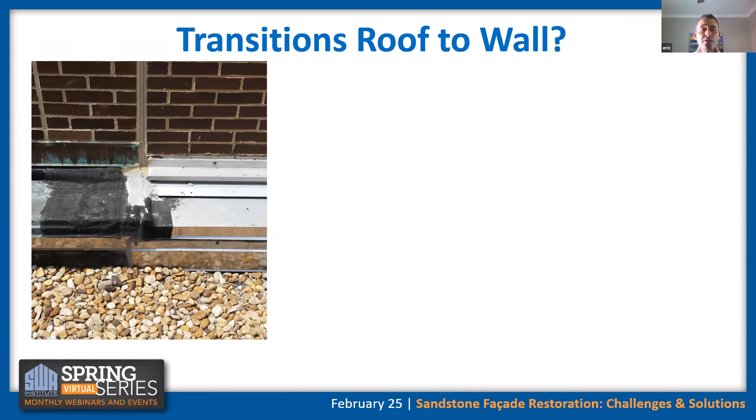Here's an example of transitions roof to wall. If you talk to a maintenance guy on this project, he'd tell you this is a 'dope and hope' condition. There's a transition right there where it could have had a boot created on that vertical and tied into

the roof joint on that horizontal to maintain continuity of seal. Here's another example, existing to new, where we'll see a vertical joint go up to maintain the proper distance and maintain the expansion joint between the two buildings, tying into that roof joint.

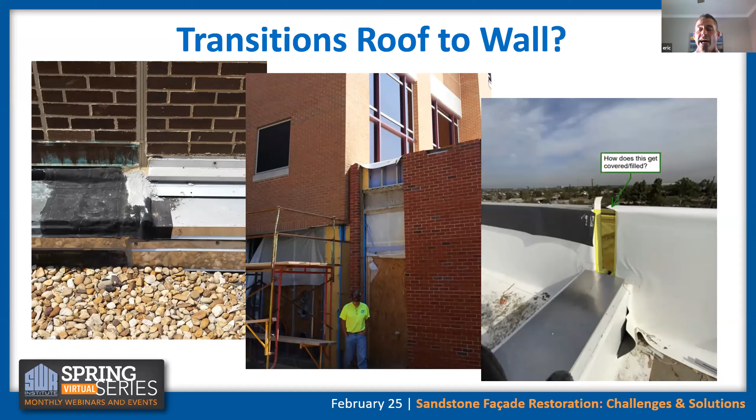Here's a common one we just recently received. Somebody had a roof joint coming into a condition on a parapet, and the question always is, how do we transition here on that parapet roof?

So when we get into roof joint, for example, this is what we call continuity of seal. This helps us transition between vertical to horizontal roof conditions. It's a patented dual seal system with a dual flange extruded rubber system that ties into all commercial roofing membranes, and then also waterproofing systems.

Uses and application areas: you'll see it on roofs, you'll see it in plaza assemblies, you'll see it on green or vegetated roof assemblies, and you also see it buried in softscape aspects.

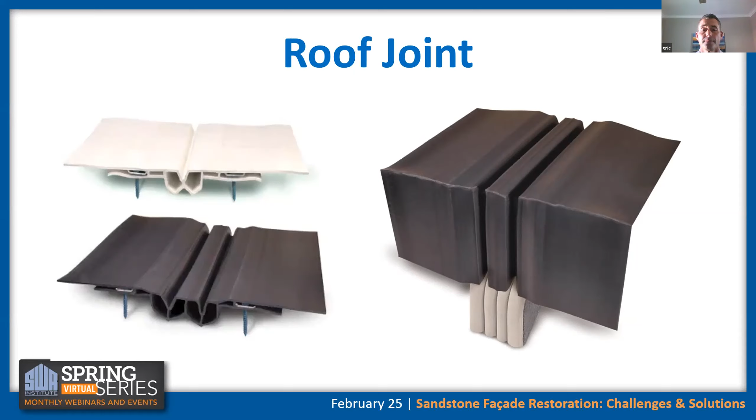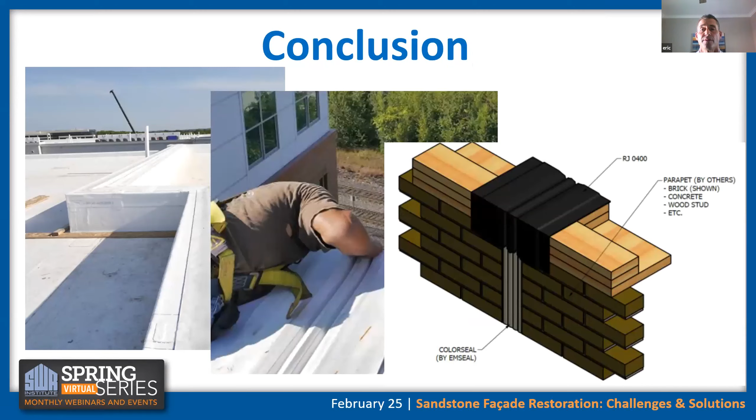Go up, I'll go up one. There should be one more slide. Well, hold on, no problem. Get it back up to where it was. Sorry. Is this it? There should have been a video section between slides 6 and 7. Well, darn it, I don't... this is all.

So unfortunately, there was an animated roofing video that really showed this well, so I'll describe it. Basically, this stuff comes as an extruded membrane, in as long runs as we can. The biggest question we always get is how do you get into a parapet condition or edge of roof. There's two conditions on a parapet. How do you do

Nicole, Eric got muted somehow. I know, I'm unmuting him. There he goes.

I don't know how much you heard regarding the animated video, but bottom line, we're going to show how we tie into TPO and maintain that continuity of seal. There's two conditions when we hit a roof condition: it's usually coming up and over a parapet and tying into the vertical, or into an edge of roof aspect. Depending on if it's over a parapet, there's two conditions we can use: basically the TPO roof membrane or PVC roof membrane to go up and over that.

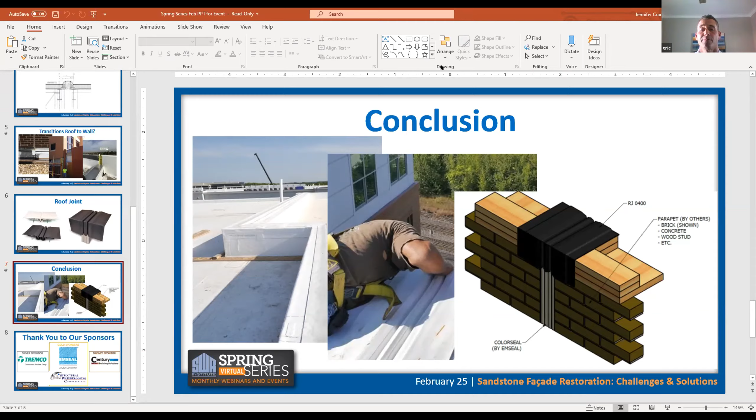In conclusion, when it's specified and designed properly, when you go vertical to horizontal, you maintain that continuity of seal, ensuring that big void spot stays airtight and watertight. I appreciate everybody's time. Unfortunately, I wish you'd been able to see the video. Maybe one time I'll be able to get that video online.

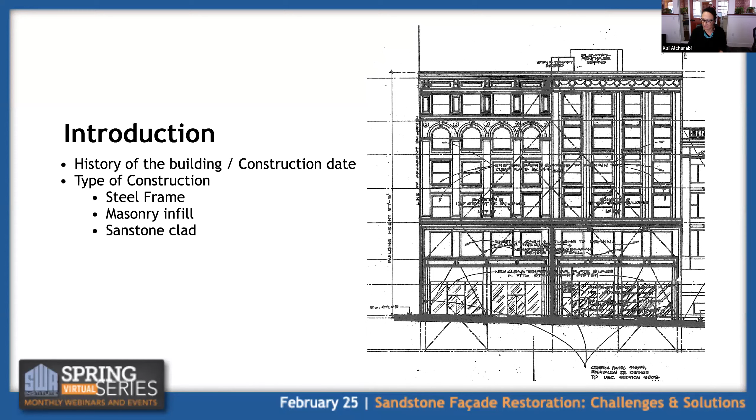We had great limitations imposed on us because of the location of the building and because of the kind of retail tenants that occupy it. The tenants are Yves Saint Laurent and Bottega Veneta, both high-end retailers who pay huge amounts of money to our client. We understood that Yves Saint Laurent pays something in the realm of $300,000 a month for rent.

So obviously they have great restrictions in their lease, limiting the duration of any construction on the facade to only 60 days. So we only had 60 days to accomplish the project. The fact that the building is divided into two facades facilitated that, because we had 60 days on one side of the building and 60 days on the other. The retail tenants are squarely underneath each one of the two parts of the facade, so that made it easier to navigate the leasing agreement requirements.

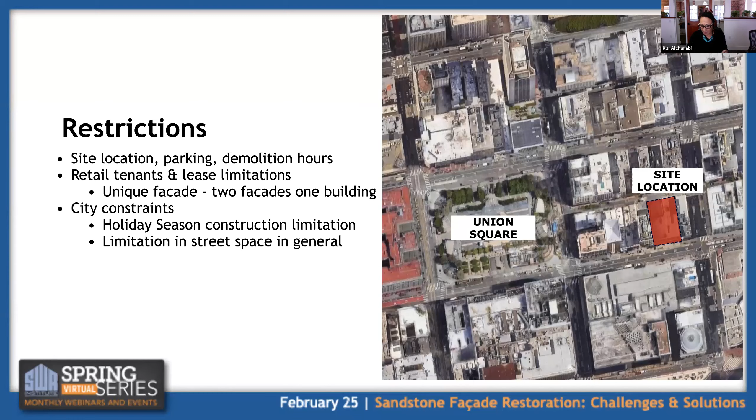That imposed additional limitations. We started by surveying the facade. We did a visual survey identifying the materials on the facade. We did some very limited destructive testing to verify the conditions behind one piece of stone. We did hazardous material testing conducted by an environmental engineer. We did adhesion testing on the coating that is on the stone, because we weren't going to remove all of it. And then we did some grout testing.

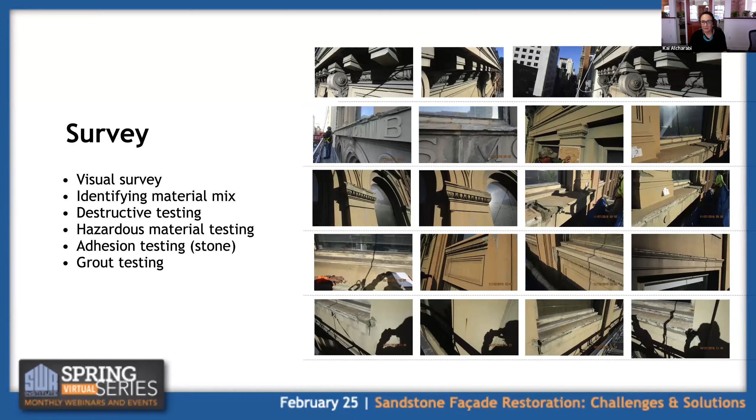The metal cornice, luckily, were really in fantastic shape. It turned out they were all zinc alloy and in just amazing shape. The building was built in the early 1920s, so almost 100 years now.

We just had a lot of flaky paint that was obviously loaded with lead.

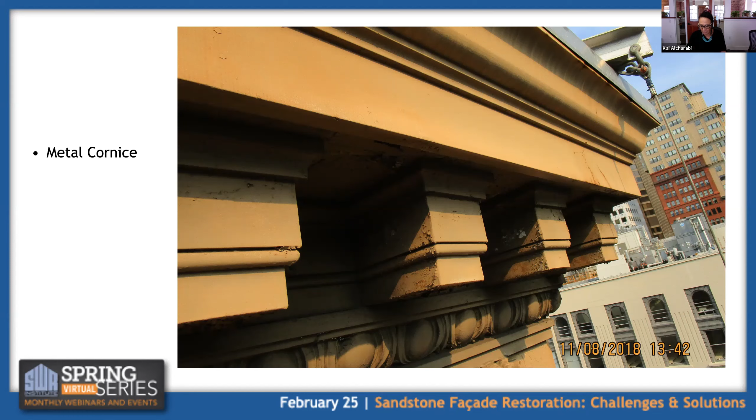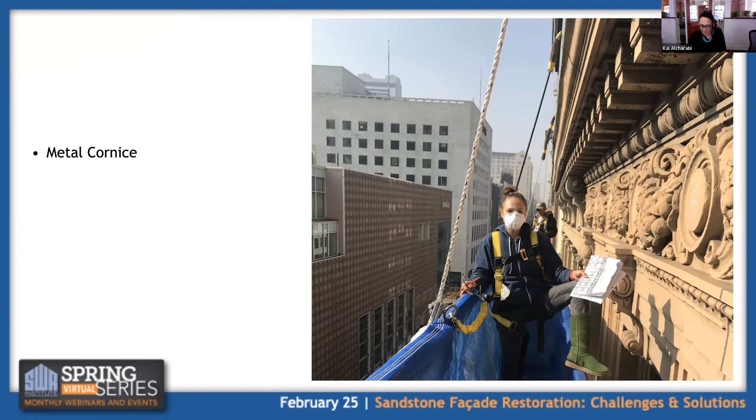Here is a couple of pictures near the cornice that my colleagues are fond of taking of me on scaffold, so that they can make fun of me later.

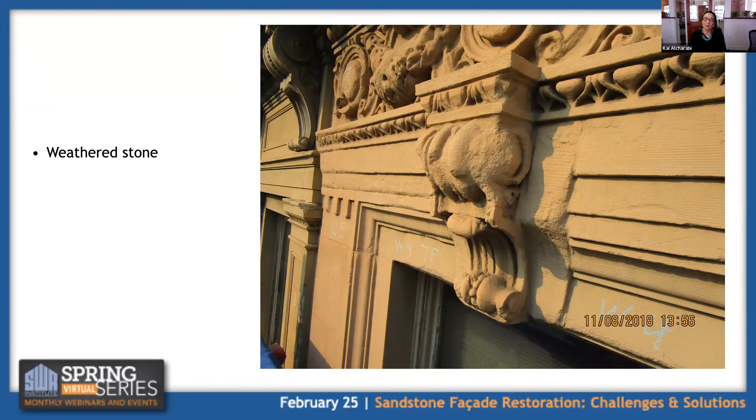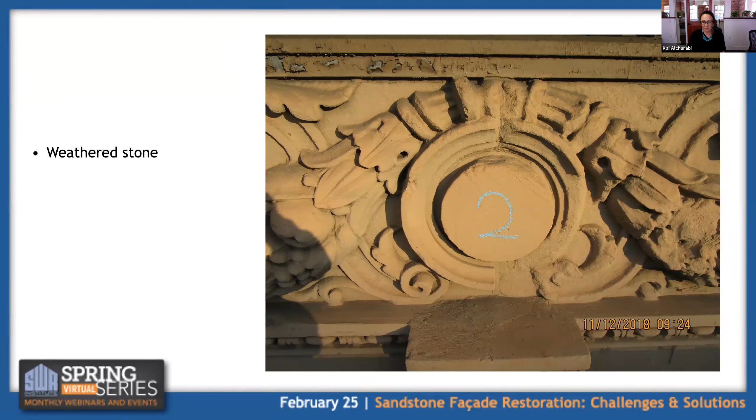The stone survey, which is the most complicated aspect of our survey, showed we had plenty of weathered sound stone -- stone that had exfoliated in the past, but had been taken down to sound stone and then painted. You can see plenty of examples where we are starting to lose details of the ornamental details on some of the cornices and other ornamental pieces, but also examples of where the stone was really sound, not experiencing deterioration.

We also had light exfoliation, and that was widespread. We had deep exfoliation as well.

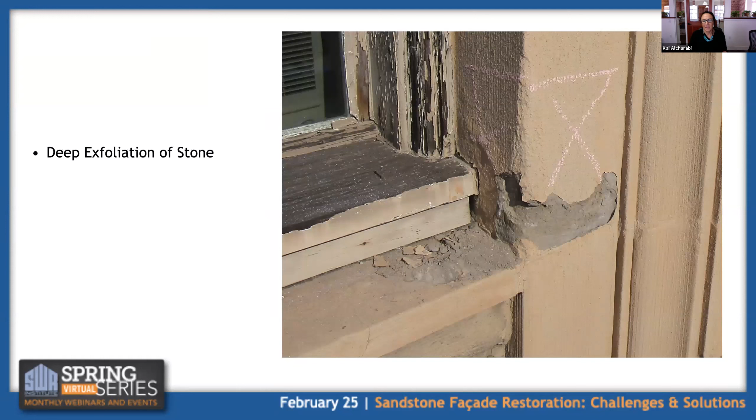Particularly a badly hit area on the building was the lettering at the top of the building, which was originally carved in the stone.

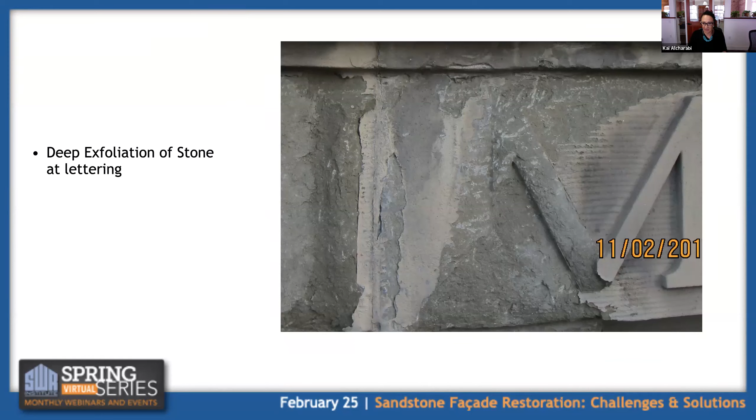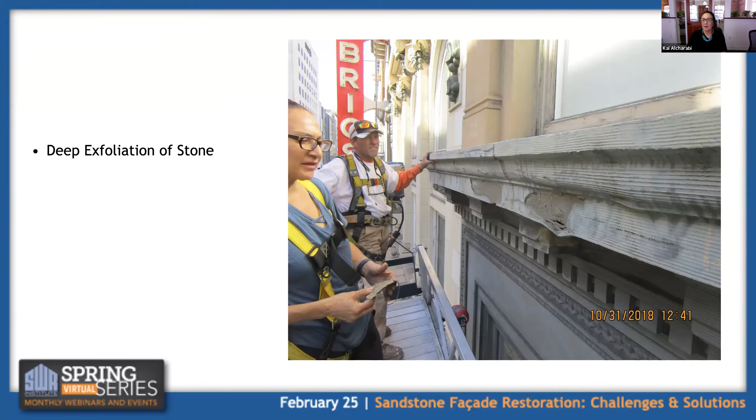Also, the ornamental stonework below the wide water table above the second floor was experiencing extremely severe deterioration. We have some broken stone.

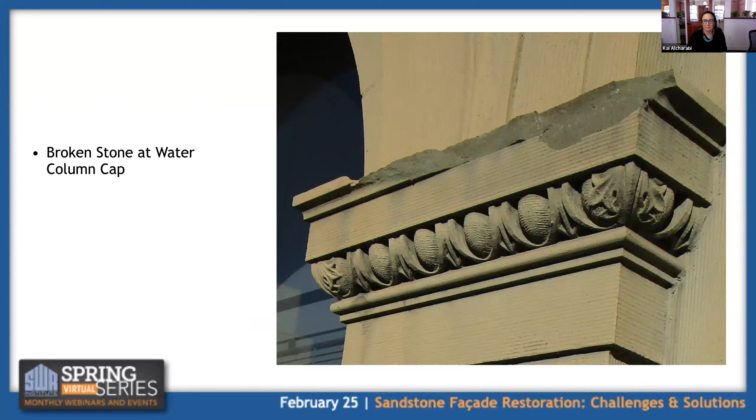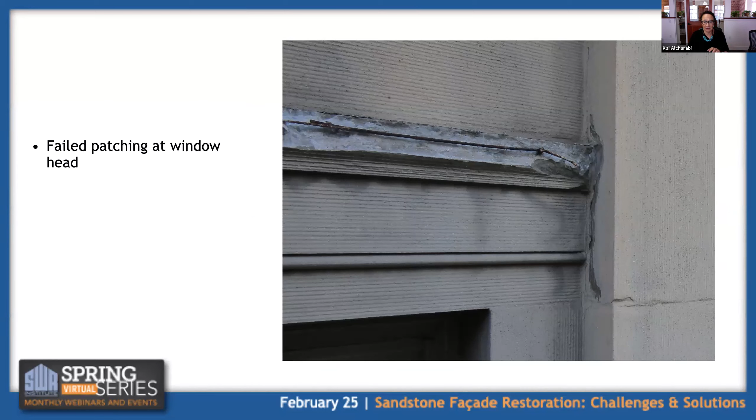And we have failed patching. The patches had been removed -- the client had the contractor go out and remove them a couple of years earlier, but we could see from the corroded rebar and the anchors where these failed patches were.

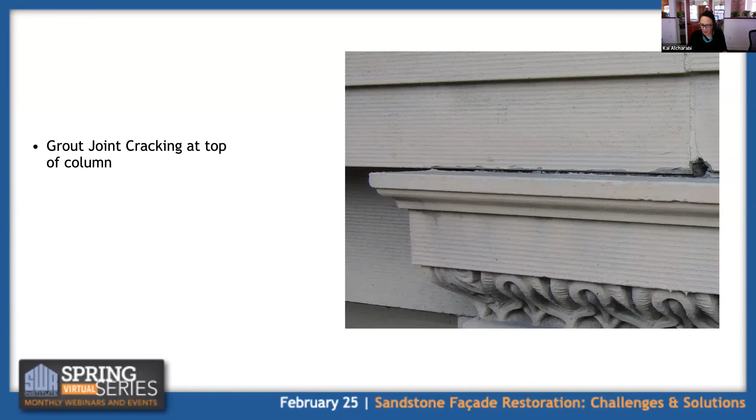And then finally, we had grout joint cracking. I have to acknowledge that because of the paint on the stone, we really missed some of where the cracks were. It turned out the grout used for repointing the building at some point in time was terrible grout that was really hard, and so it was cracked, but it wasn't very readily visible everywhere. This is just an example of a joint in the stone in one of the water tables.

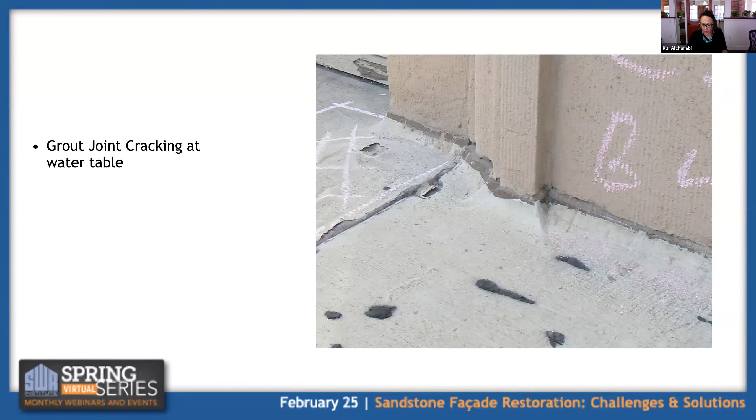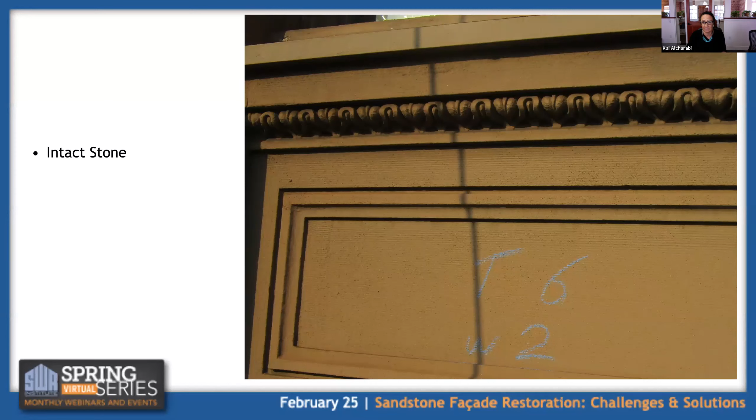We had plenty of intact stone that may have had some minor spots of weathering, but plenty of details were intact. We had no cracking of the stone itself anywhere on the building, which was really amazing.

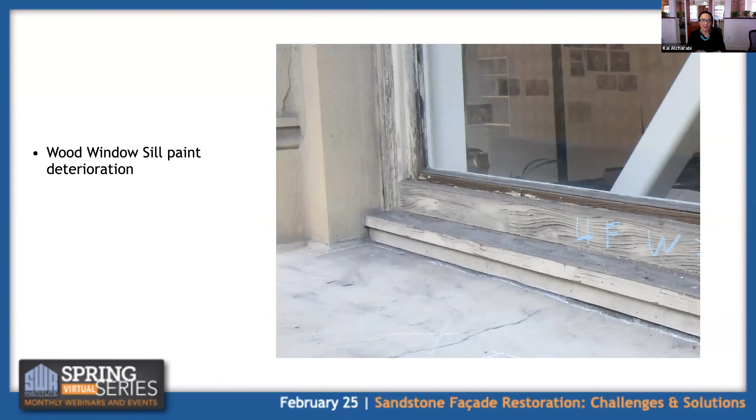Wood windows were in very bad state of repair. All the windows on the building have been fixed shut. The windows are air conditioned. The building is air conditioned.

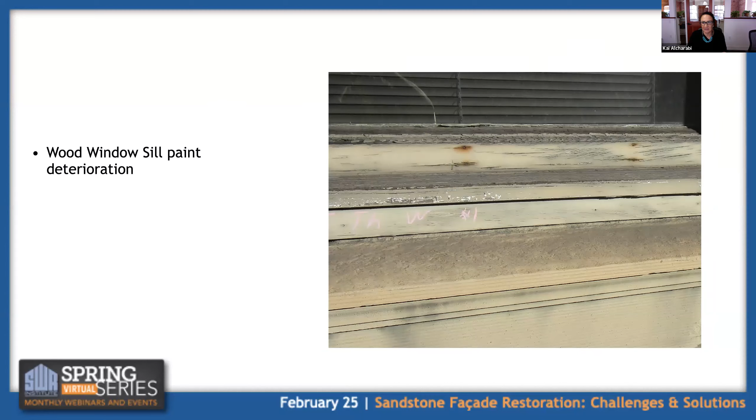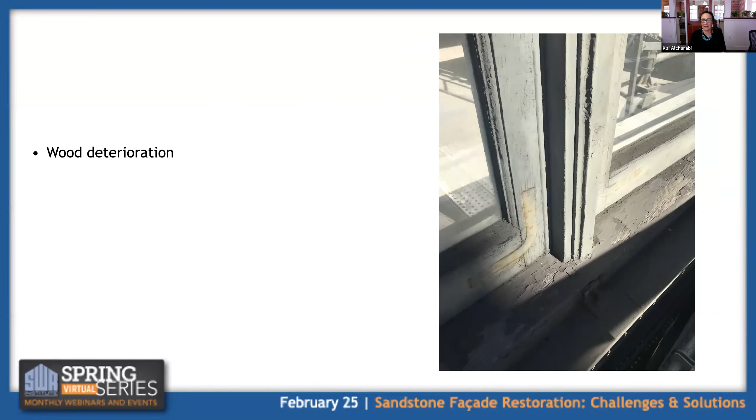We have deteriorated paint and lots of really bad glazing stops. We ended up replacing the majority of the glazing stops and some of the trims that got added over the years. We don't quite understand all the different layers of repairs that happened on the building for the wood windows. Some of them, as you can see on this slide, were reinforced with sheet metal angles at the corners to stabilize the sashes. And then completely decayed sills in isolated areas, primarily close to the large water table, because I think water was allowed to linger there.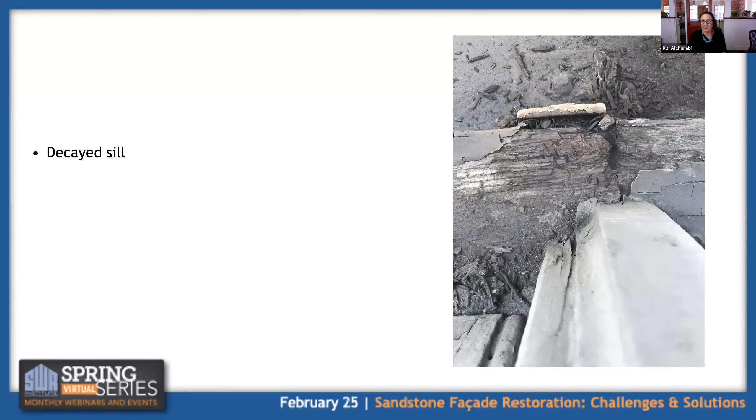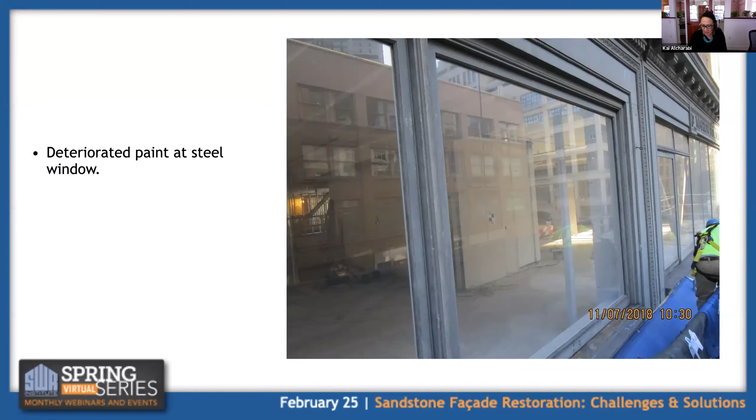Steel windows on the street level and the second floor were really in amazingly good shape. These steel windows had wood sash inserts in them. Here's an example of the worst corrosion we found on the steel windows — just some minor surface corrosion.

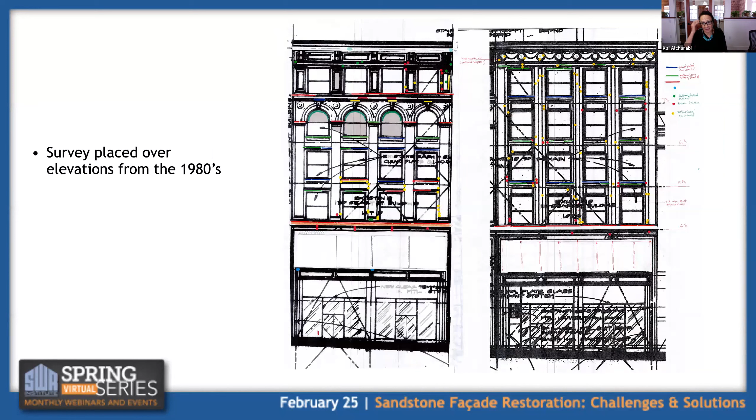We compiled the survey on an old elevation, which was the only elevation the client had at the time. So that was our survey compilation. Then we entered into pre-design. The client wanted us to roll immediately into production of a permit set.

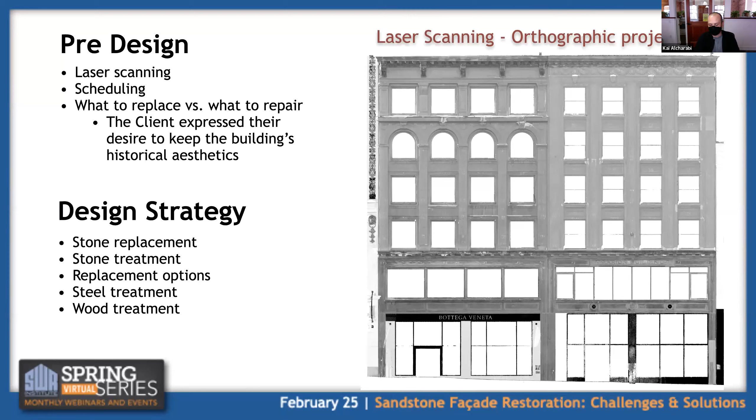So with that, we actually went into the design strategy, talking to the client about what stone to replace, what stone to treat, and what the replacement options were, and also how we were going to treat the steel and the wood. From here, we jumped into our design and our set, and I'm going to walk you through the set that we actually submitted to get the permit.

But before then, I just want to talk about the entire design criteria. I'm going to read these points because I think they're important — they do get at the whole criteria of work. One of them: replacing deteriorated stone windowsills in kind.

Resegmenting the large water table to allow utilization of natural stone — you'll see that on the 7th floor water table. Replacing ornamental column capitals and other critical features in kind, capping repaired or replaced stone water table, and windowsills with zinc-coated copper. Dutchman repair on broken stone, rebuild lettering on site, patching and resurfacing deeply exfoliated stone, resurfacing lightly exfoliated stone, and restoring wood windows, replacing decayed sashes as necessary. And of course, stripping and coating the zinc cornices and steel windows, and recoating the stone.

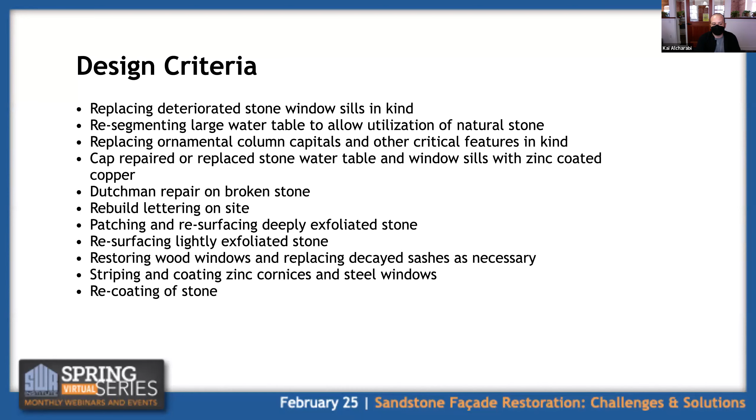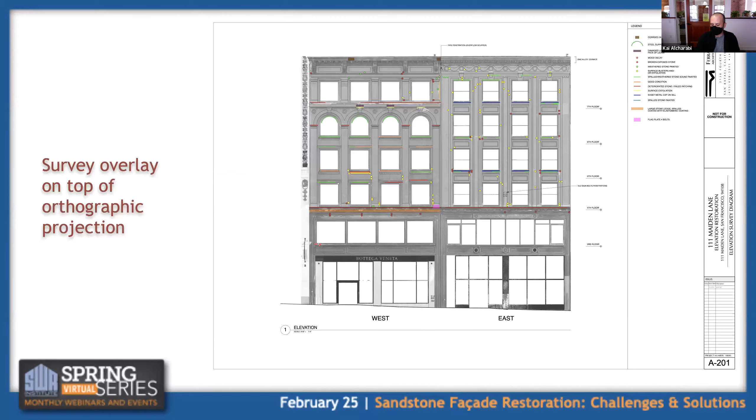So one of the ways we approached this was by taking the orthographic drawing and overlaying our survey on top of it. This helped a lot with first communicating with the city to get the permit regarding the building's situation, and also with communicating with our contractor about where each issue was located. This is zoomed in to our legend.

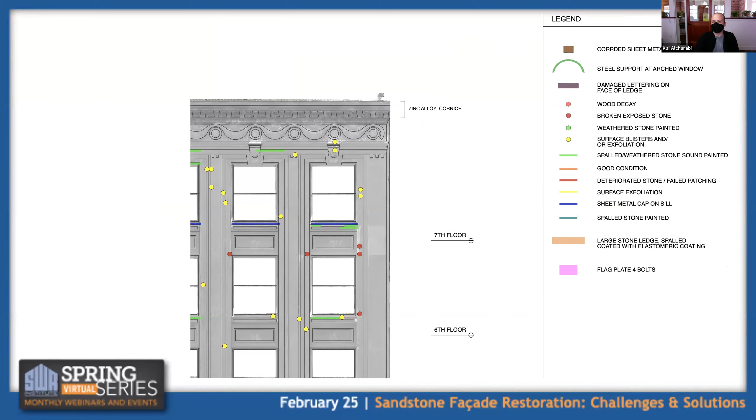So as you can see, we identified each problem with color-coded dots. Then we did the same by overlaying our scope of work on top of the orthographic projection. This was also a tremendous help in the field because it was easy to pinpoint right away what the problem was and how we were going to treat it. You just flip between the two pages and you have a complete picture of our scope of work. I think that was a very thorough scope of work diagram that helped a lot with all aspects of the project.

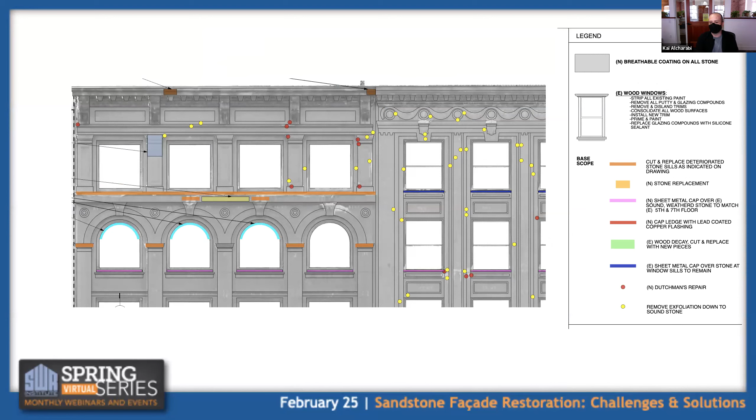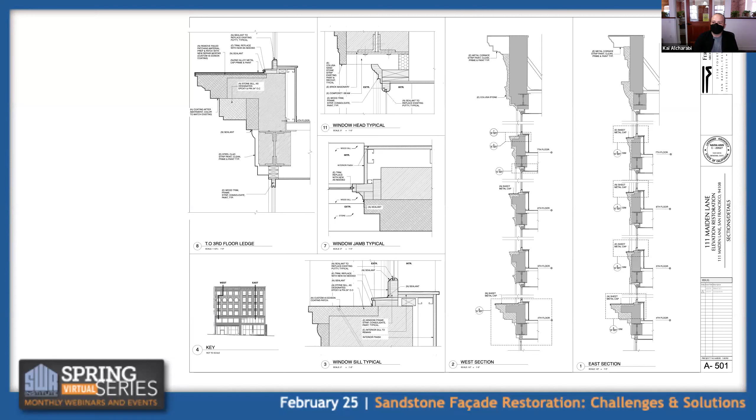Then we did a general one-sheet of details, trying to capture the most important parts. As you can see, we have two sections of the two facades, and we have some details of the window heads, and also details of the windowsills and how we were going to pin them. These were, overall, just meant to capture what we were changing, but I would say the most important thing was always referring back to our scope of work diagram that really identified each thing we were doing on the project in detail.

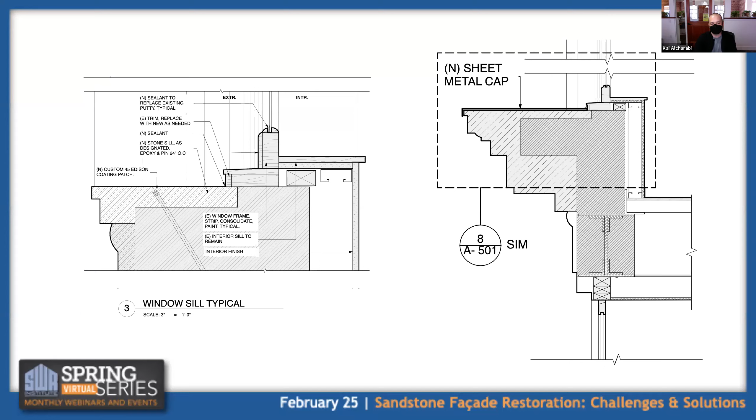So I'm going to walk you through the construction, starting from the top of the building all the way down to the bottom. So the metal cornice - in these pictures you'll see the progress of the work, the kind of work in progress and what's going on.

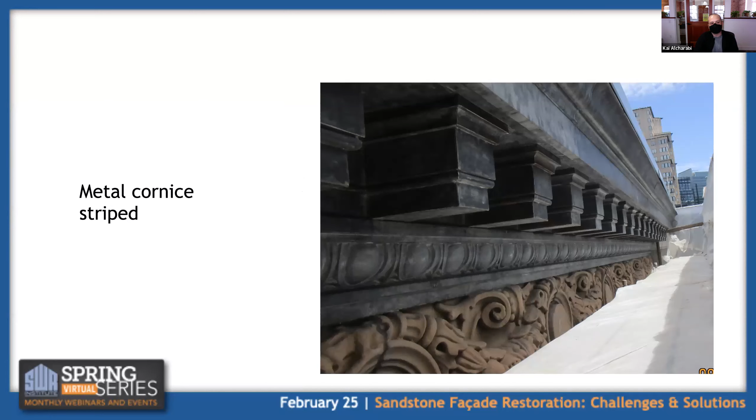Metal cornice stripped, primed, painted, some details of it, stonework. It's important that the pieces of stone that had to be replaced, we had to take out and had to abate it. So these are just stripping mock-ups that we had to do on stone.

Let me just insert something here that may be useful to say at this point. We found out that the stone coating is BMC, and I have to give credit to our colleague who's also a member of SWRI, Mike Courtney, because he worked on the building 30-35 years earlier, and he remembered the product being BMC.

For some reason, although it was BMC, the testing had enough lead in it that we were forced to abate the pieces of stone that were going to be removed. So what you're seeing in this slide is simply the mock-up testing of the different products that the contractor was going to choose from, to do localized abatement of the pieces of stone that had to be either worked on or removed for replacement.

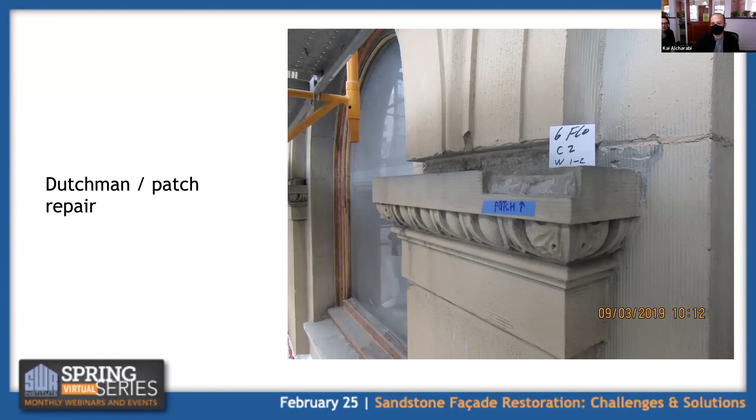So I'm just going to run through the stonework. This is an example of Dutchman patch and Dutchman repair and patch. You can see - this is a combination of patch and Dutchman repair.

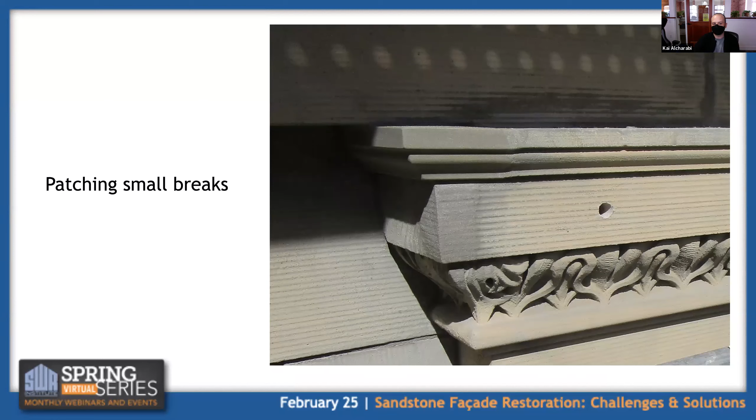This is the same image that we saw in the survey where the corner was broken, and this is the patching. This is the water table at the 7th floor. You can see it's segmented, and of course it was capped afterward.

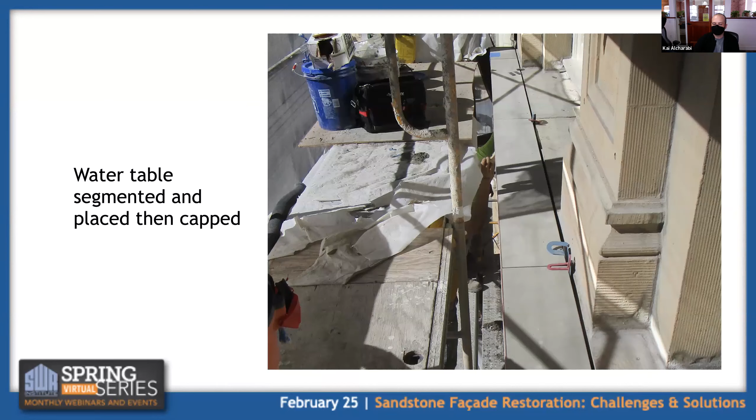This is an example of Dutchman repair, and this is a preparation to receive the new stone.

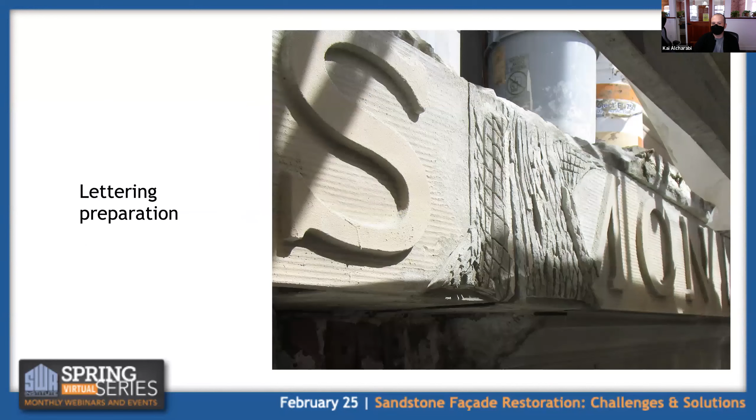And here we're showing how we fix the lettering. The approach was to do the lettering by patching it. We did a lot of templates, trying to get the correct font of the lettering in order to restore it. You can see it finished here.

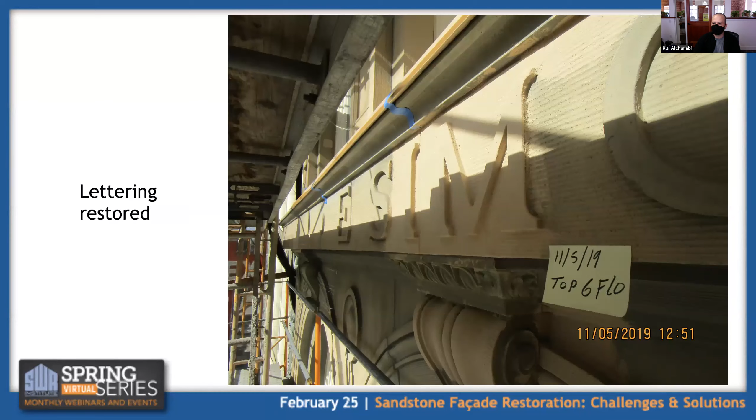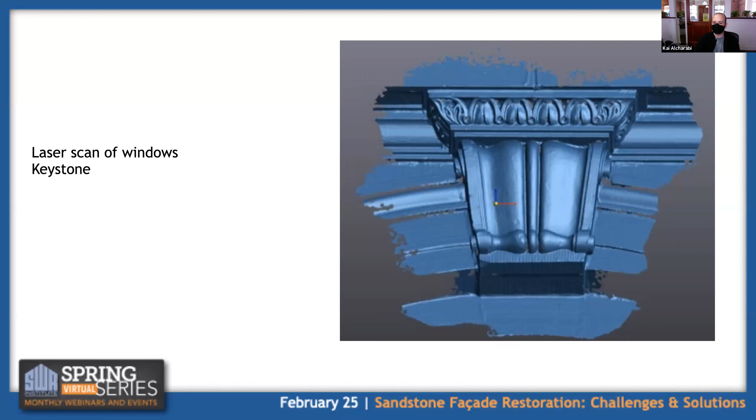And this is an example of the laser scanning and reverse engineering that we did on some of the very intricate ornamental pieces. This is the window cap - the keystone, sorry - on the arch windows. You can see this is an image of the laser scan. These are the shop drawings, and here it is placed.

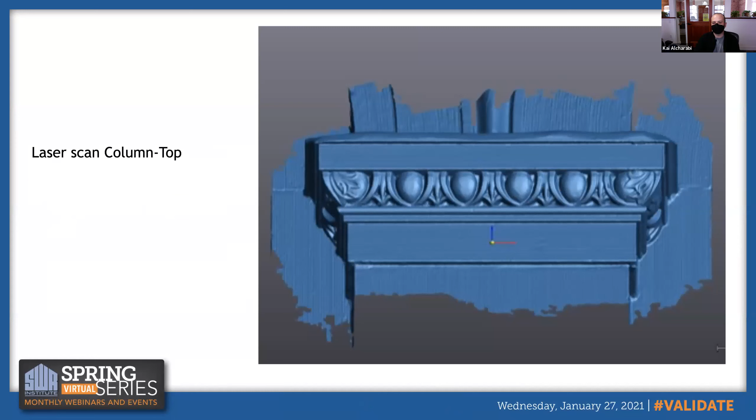Again, this is basically the column that joined the two arch windows. This is the top part of it. Shop drawings, placed.

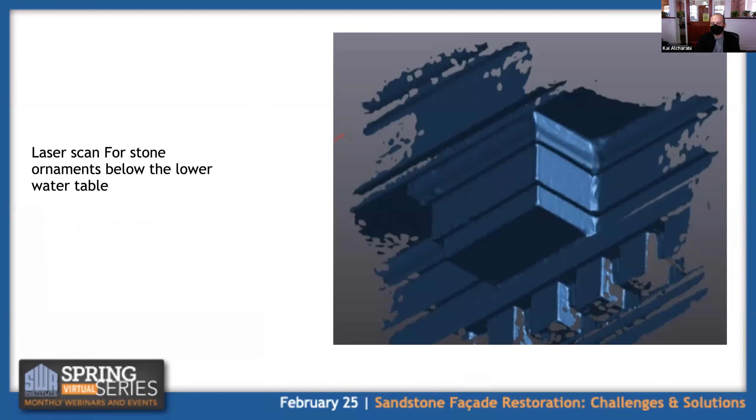And this is the ornament piece at the lower part below the water table. Shop drawing, and this is in preparation to remove the deteriorated bad one. Preparation to receive the new one - reverse engineered, placed.

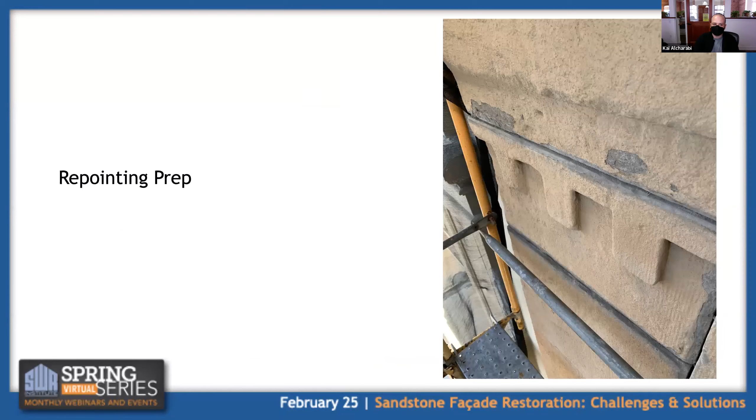And this is an example of the repointing prep, and then the repointing being done. And then coating - I'm going to turn the presentation to Nadia to talk about the coating.

The most challenging part of the work on the entire building, I felt, had to do with recoating the stone. We were very nervous as to what we're going to get when we apply new BMC over the existing BMC. We had to resolve with PROSOCO what mileage is allowable, how we can build it, and also how to texture it.

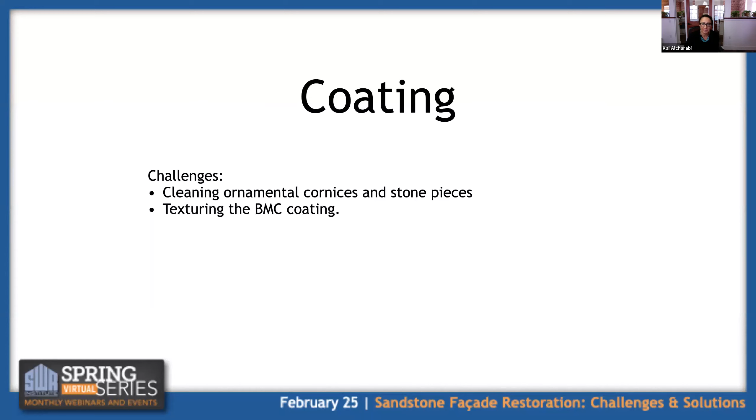Because what we found out when we got on the building is that at some point in time, in addition to being painted or coated, it was also textured. We didn't know exactly how or what process was used before, but we knew that the only way we can texture is by introducing sand into one of the new coats of coating. So that was a lengthy process to resolve with PROSOCO, and it took many, many layers of mock-ups, which we'll get into in a little bit.

The other challenge we really had in recoating the stone is adequately cleaning the ornamental pieces so we can get good bond with the new coating. I'm showing here the stone cornice below the metal cornice on one side of the facade, because that's where we had the most difficulty. The contractor, after power washing, we get up there and put tools in all kinds of crevices and pull dirt and loose coating. It turned out to be really time consuming with Alpha Waterproofing dedicating people to hand clean all these details thoroughly so we could recoat them.

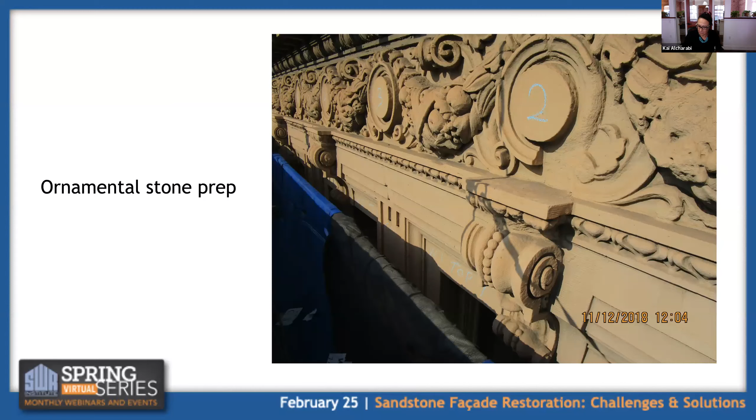Here we have an example of weathered stone that's sound and was previously painted, but in many places didn't have the same texture as the rest of the building. That's where we needed to incorporate some broadcasting to match the texture.

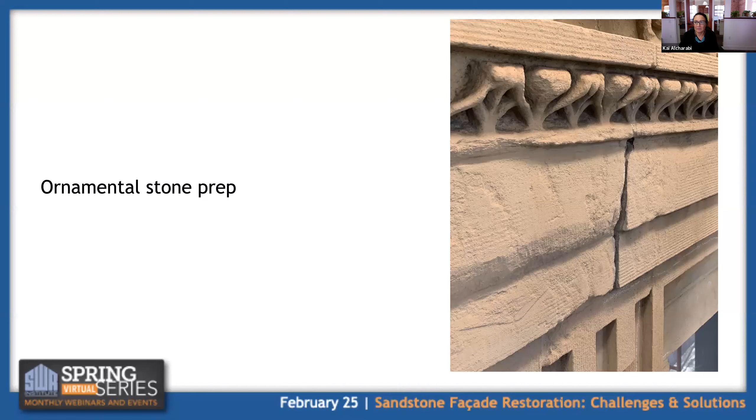Oh sorry, how can we up the sound? All right, I'll try and speak louder.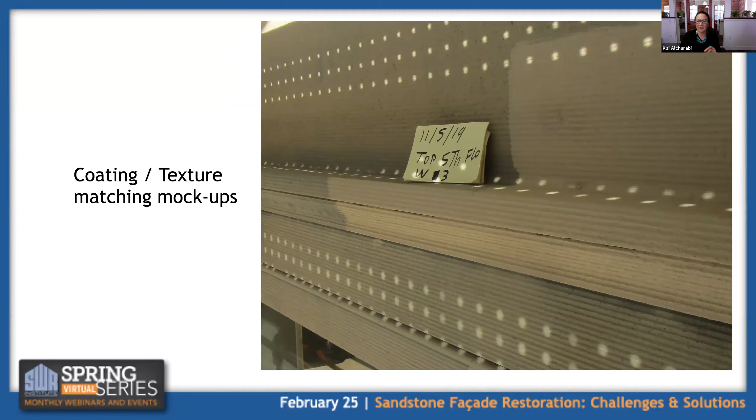We ended up having to try and match area by area, which was another layer of difficulty in the implementation - how to make the stone look even and blend together, although we had areas that were more heavily textured than others that were lightly textured. These are examples of the numerous brush-outs we had on the building to try and pin down the right texture in different areas.

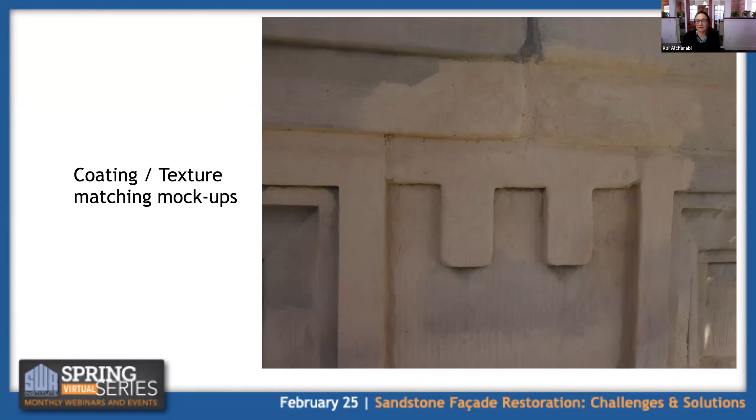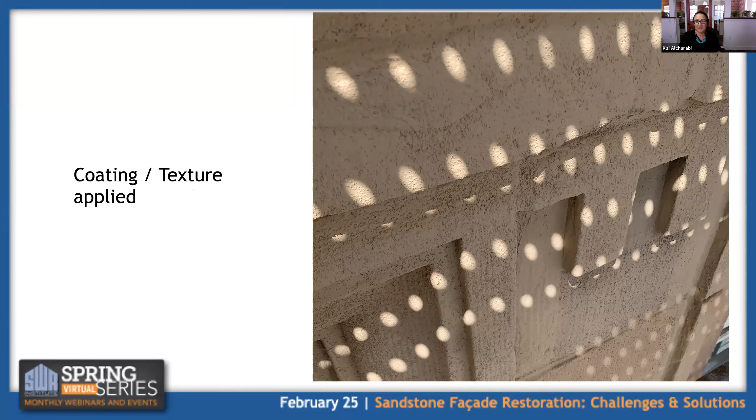This is again an example of weathered stone that we had to introduce a little bit of texture to. And another example - you can see within the same photograph the variation of texture we had.

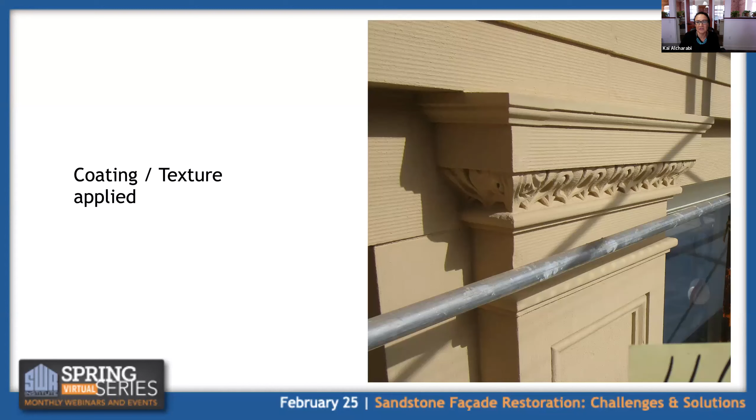This is an example of a finished corner on the stone where we had to lightly texture to blend in with the surrounding, as opposed to areas where we had the heavy texture. This is a close-up of a finished coating. Another example.

So we're back to the windows. I wanted to spend a few minutes discussing what I thought was the most difficult aspect of the implementation of that work for me. Hopefully when we're done with the presentation, Jacques Tabry with Alpha Restoration and Sarah can step in and shed some light on the challenges on their end. I'm going to turn it back over to Kai.

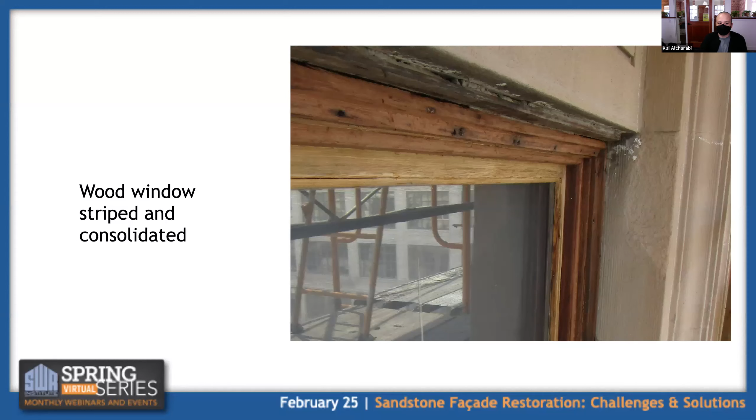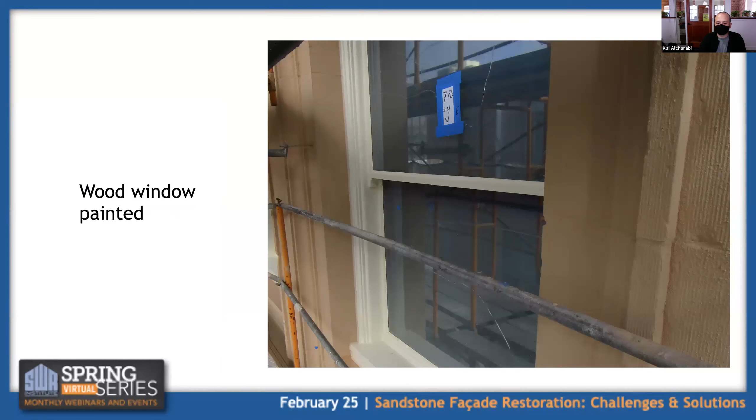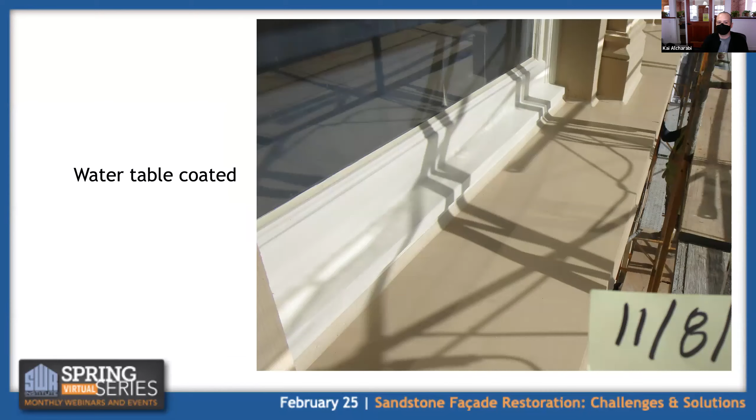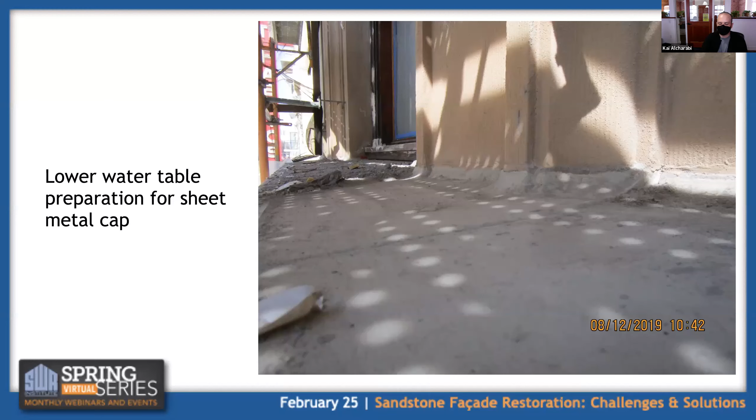This is a window sill metal cap, primed and painted. This is the water table, the upper and lower table after it was capped and then painted. Now the bottom water table, we did do some cleaning in order to receive the new patching - there was some field patching needed. We removed the damaged material, patched it, and then installed the sheet metal cap.

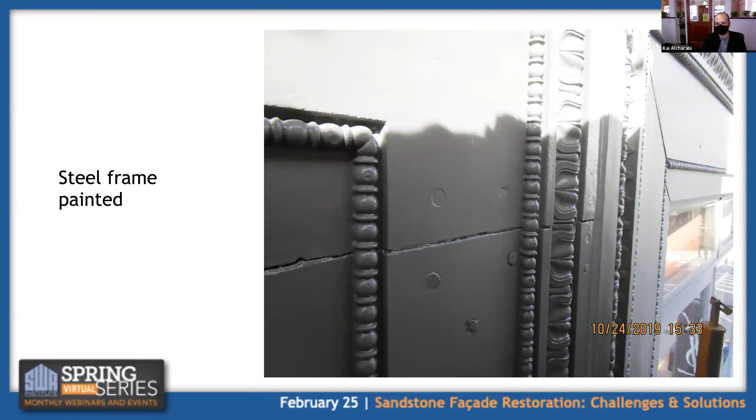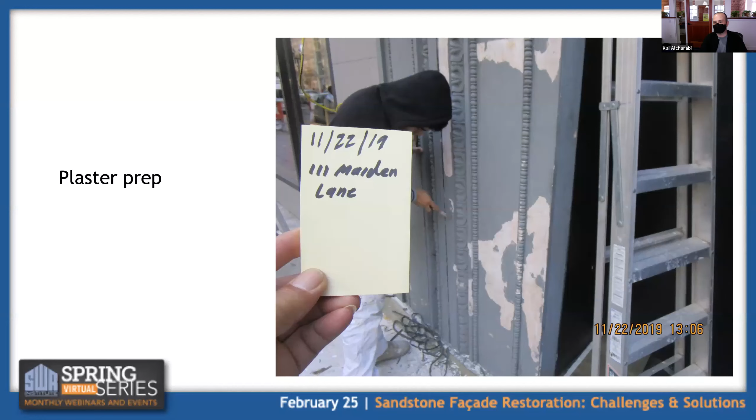So, primed - the steel frame windows, I'll just show an example of how it was stripped, primed, and then painted. At the bottom part there is actually plaster that was made to imitate the steel, so we just cleaned the looseness and loose exfoliation on it, then it was prepped and painted. You can see the result there.

So in conclusion, we want to share some images of the completed building with you after the scaffolding was removed and the retail tenants were happy again. Unfortunately, we don't have a picture of the Emseal that got installed between the building and the adjacent buildings on the vertical joint.

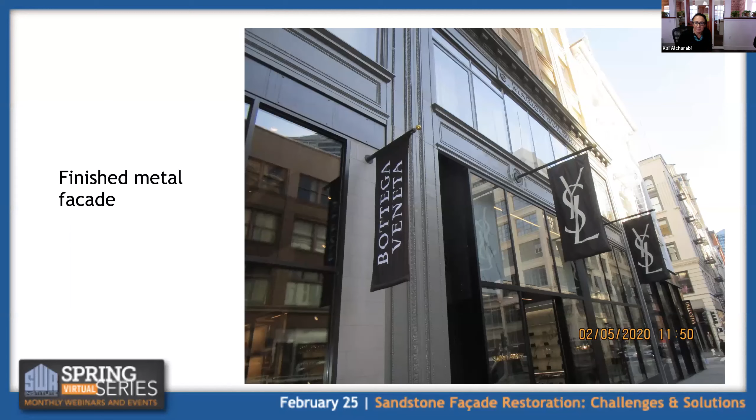But I just want to say in conclusion that we were very fortunate to be working with the team we were working with, including our client, who didn't try to pressure us to cut corners or make things cheaper than we felt was necessary to produce work that meets good preservation standards.